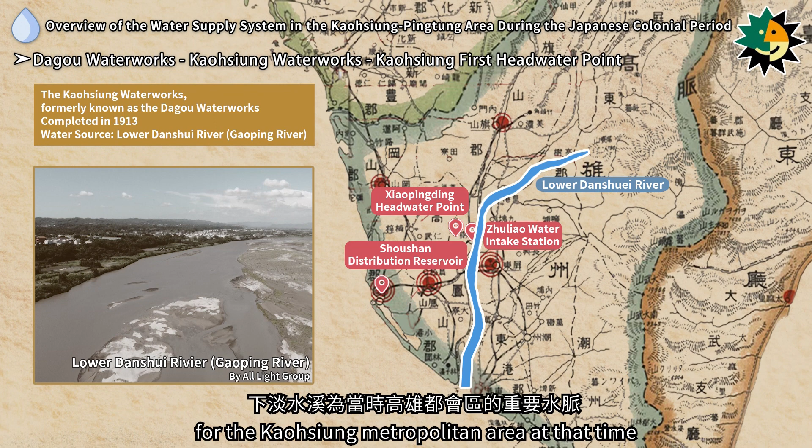The Kaohsiung First Headwater Point consisted of the Zhuliao Water Intake Station, Xiaopingding Headwater Point, and Shoushan Distribution Reservoir. This was Kaohsiung's earliest waterworks, completed in 1913, and the water was drawn from the Lower Damshuei River, which was an essential water source for the Kaohsiung metropolitan area at that time. The Kaohsiung First Headwater Point primarily supplied water to the urban area west of the Love River.

The Kaohsiung Second Headwater Point consisted of the Wongongyuan Water Purification Station and the Cao Tan Distribution Reservoir, completed as an expansion in 1942. It sourced water from the underground flow of the Lower Damshuei River. The Kaohsiung Second Headwater Point mainly supplied water to the urban area east of the Kaohsiung River.

The Qishan Waterworks was completed in 1925. Due to Japan's financial difficulties at the time, it was funded by private organizations. The water source was drawn from the Qishan Canal of the Nanzixian River and channeled into the waterworks through the canal, bringing a continuous supply of water to Qishan Township.

The Gangshan Waterworks was completed in 1925, sourcing its water from the Baijia Canal of the Agongdian River. In 1937, an elevated water tower was added, which became a landmark in Taiwan's architectural history.

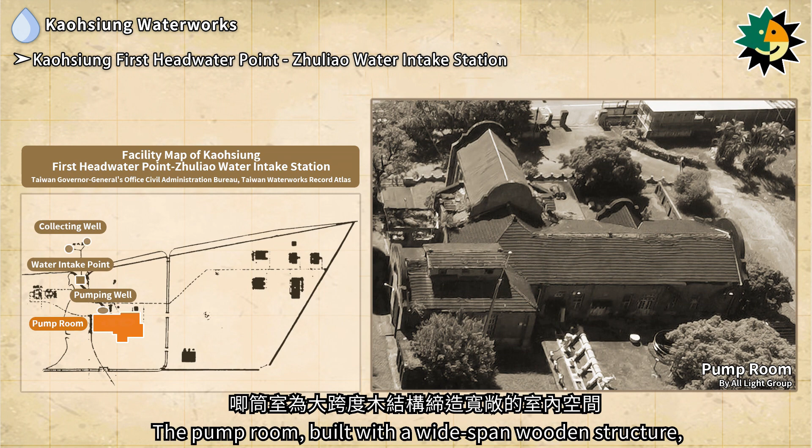The Zhuliao Water Intake Station, originally named the Dagou Waterworks Pump Room, was completed in 1913. The station included a collecting well, water intake point, pumping well, and pump room. The pump room, built with a wide-span wooden structure, provided a spacious interior equipped with modern power-driven pumps.

In 1998, it was designated as a Grade 3 historical site by the Ministry of the Interior, and it is now a municipal monument in Kaohsiung City.

The Xiaopingding Headwater Point, located in Xiaopingding, Dashu Village, was completed in 1913. The site included facilities such as a distribution well, sedimentation tank, sedimentation well, sand filter, sand filtration well, water conveyance well, and sand washing area.

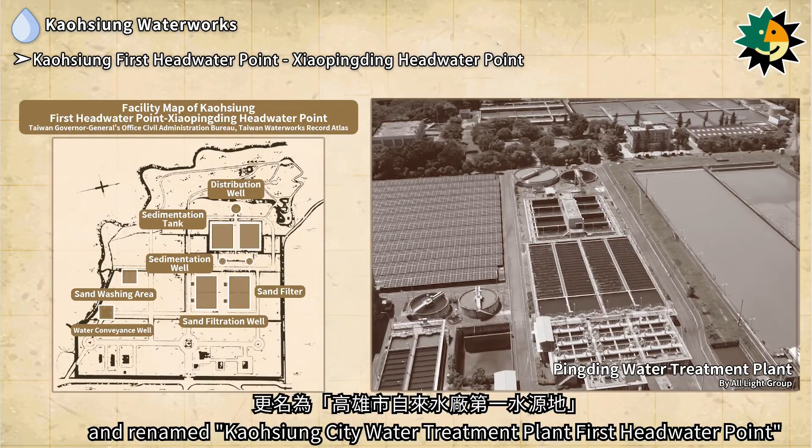After the retrocession of Taiwan, the site was taken over by the Kaohsiung City government and renamed Kaohsiung City Water Treatment Plant First Headwater Point. Covering an area of about 25 hectares, it was renamed the Pingding Water Purification Station in 1974 and integrated into the Taiwan Water Corporation as one of the 6 purification stations serving the greater Kaohsiung area.

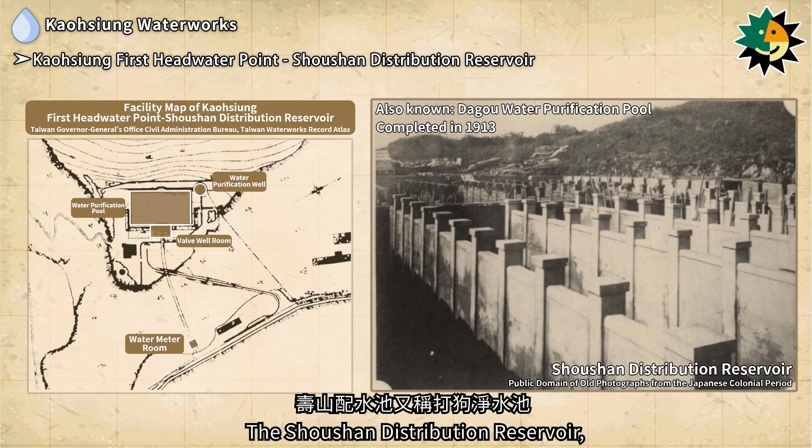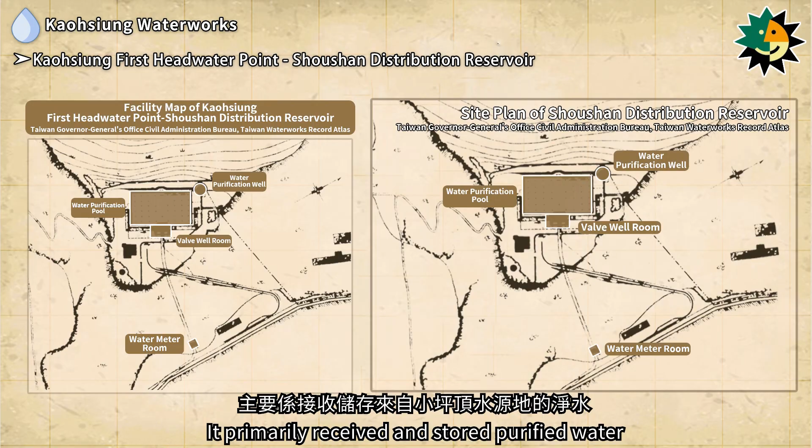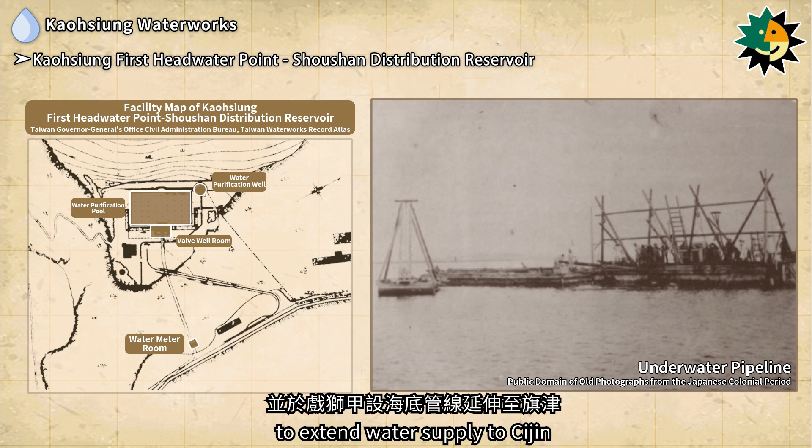The Shoushan Distribution Reservoir, also known as the Dagou Water Purification Pool, was completed in 1913. The reservoir housed facilities such as a water purification well, water purification pool, valve well room, and water meter room. It primarily received and stored purified water from the Xiaopingding headwater point, which flowed through the valve well room to the water meter room at the foot of the mountain and distributed water to the urban area. Additionally, an underwater pipeline was laid at Xishijia to extend water supply to Cijin and provide water to the urban area of Qihou.

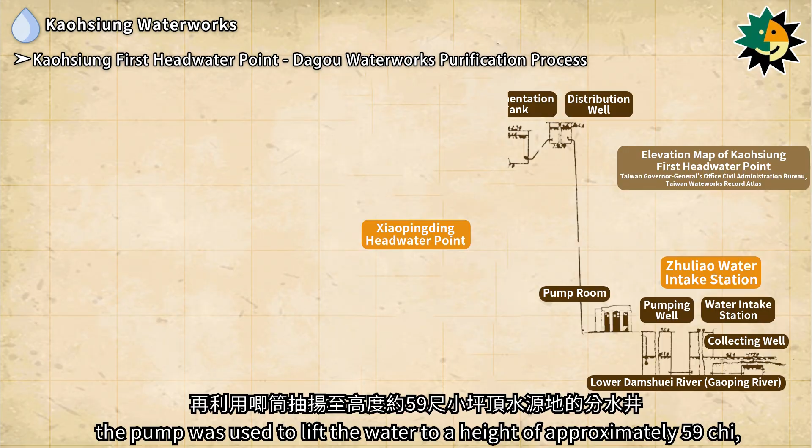The purification process at the Kaohsiung first headwater point began by collecting raw water from the Lower Damshuei River into a collecting well at the water intake station. After water was drawn through the water intake point and into the pumping well, the pump was used to lift the water to a height of approximately 59 chi, where it reached the distribution well at the Xiaopingding headwater point. After undergoing sedimentation, filtration, and disinfection, the clean water was first collected in the conveyance well.

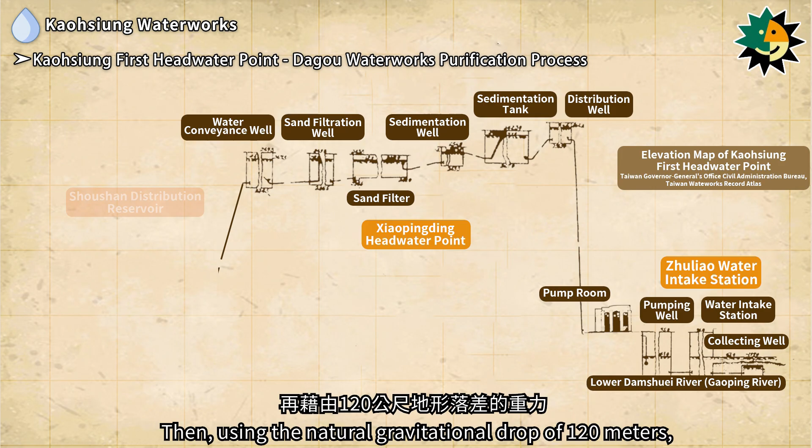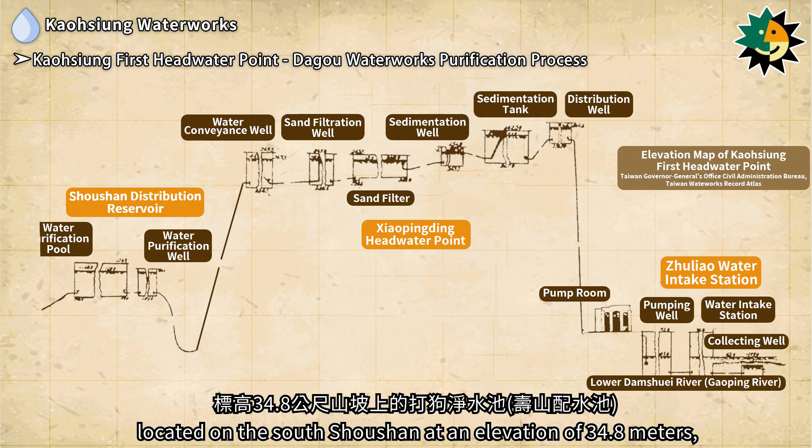Using the natural gravitational drop of 120 meters, the purified water was transported to the Dagou Water Purification Pool located on the South Shoushan at an elevation of 34.8 meters, supplying water to Dagou Port and the urban area.

As factories and heavy industries rapidly developed in the Kaohsiung area, the demand for water significantly increased. In 1942, the second headwater point was established in Wengongyuan, Daliao village, to collect groundwater using collecting wells. Additional facilities such as aeration basins and sand filters were installed, and a distribution reservoir was built on the hills of Kaohsiung and Daliao to supply water primarily to the areas east of the Kaohsiung River.

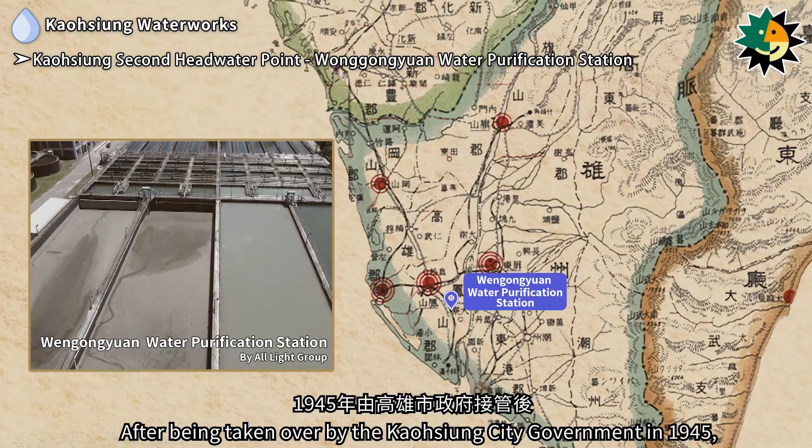The Wengongyuan water purification station, located in Daliao village, was completed in 1942, with a designed output of 8,350 cubic meters per day, capable of serving 50,000 people. After being taken over by the Kaohsiung city government in 1945, the plant underwent continuous improvements and expansions, and it now has a designed output of 36,000 cubic meters per day.

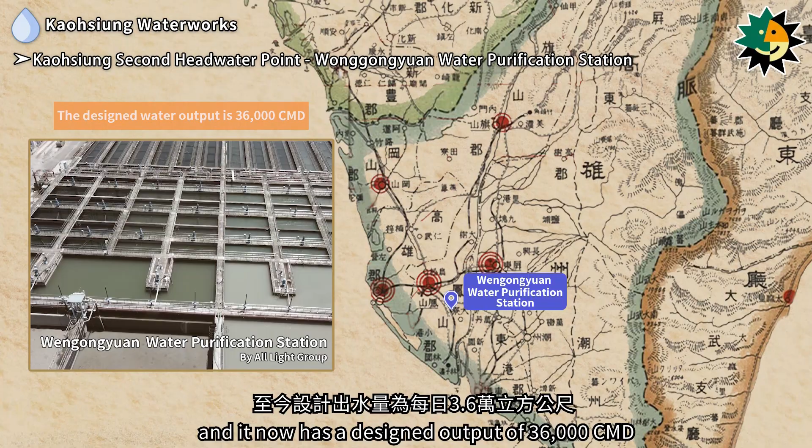The Kaohsiung Distribution Reservoir, located on the hills of Kaohsiung and Daliao, was completed in 1942. It primarily distributed purified water from the Wengongyuan water purification station to the Kaohsiung area. After the completion of the Kaohsiung water treatment plant in 1972, the distribution reservoir was decommissioned and no longer used.

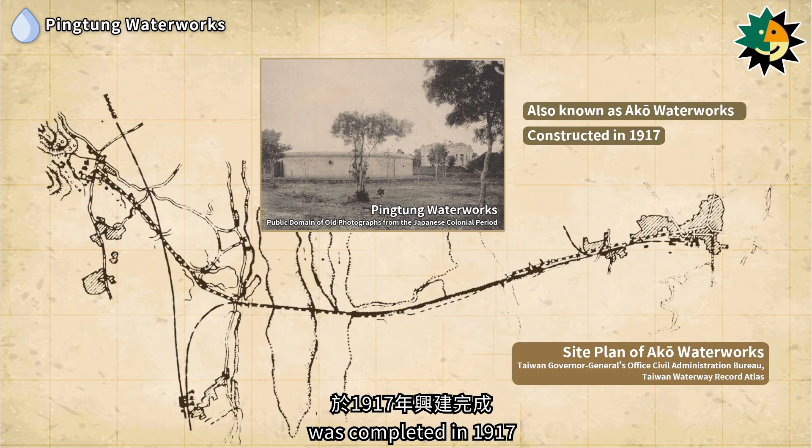The Pingtung Waterworks, also known as the Akō Waterworks, was completed in 1917. Its purpose was to meet the local residents' water needs and improve environmental sanitation.

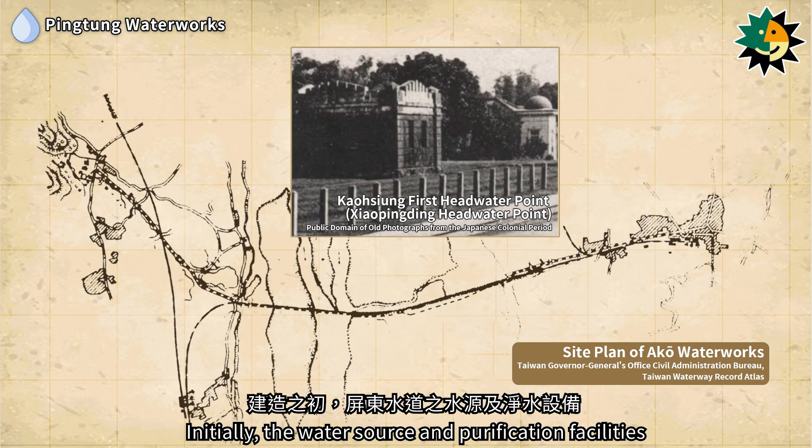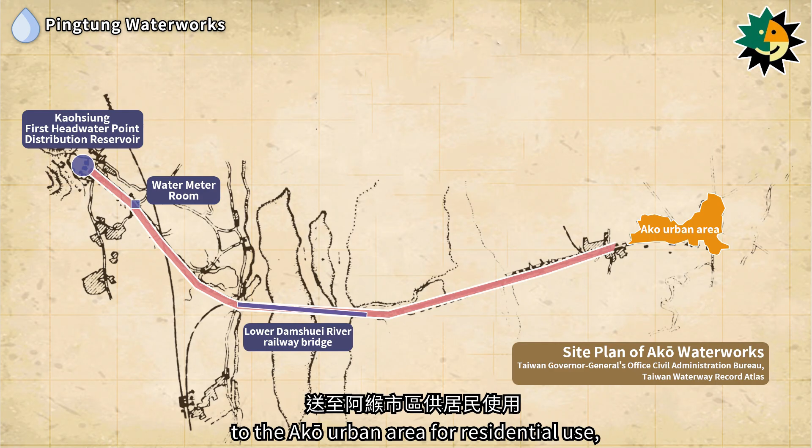Initially, the water source and purification facilities of the Pingtung Waterworks were shared with the Kaohsiung first headwater point. After the water was filtered at the Xiaopingding headwater point, it was transported via the Akō Waterworks water meter room and the Lower Damshuei River railway bridge to the Akō urban area for residential use, with a planned supply for 15,000 people. As Pingtung's population grew and the water supply from the Kaohsiung first headwater point became insufficient, a new headwater point was sought for the Pingtung Waterworks in 1934.

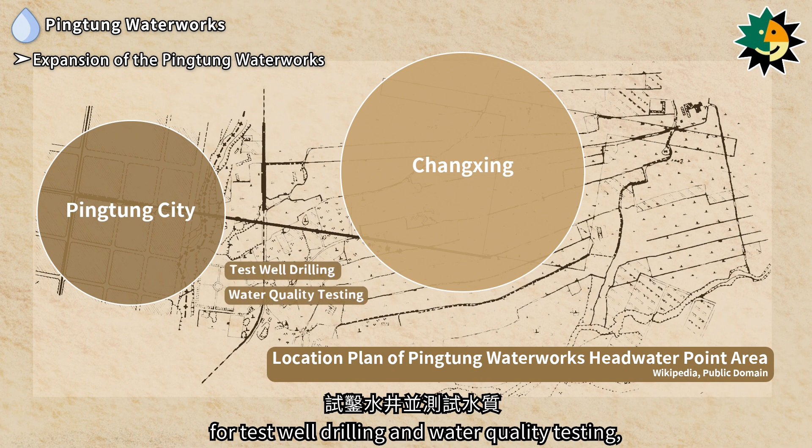The eastern side of Pingtung City, in the Changxing area, was selected for test well drilling and water quality testing, which revealed that the groundwater was both high quality and abundant. Thus, in 1936, Changxing was established as the new headwater point, and the expansion of the Pingtung Waterworks was completed in 1938, allowing the Pingtung Waterworks to operate independently from the Kaohsiung first headwater point.

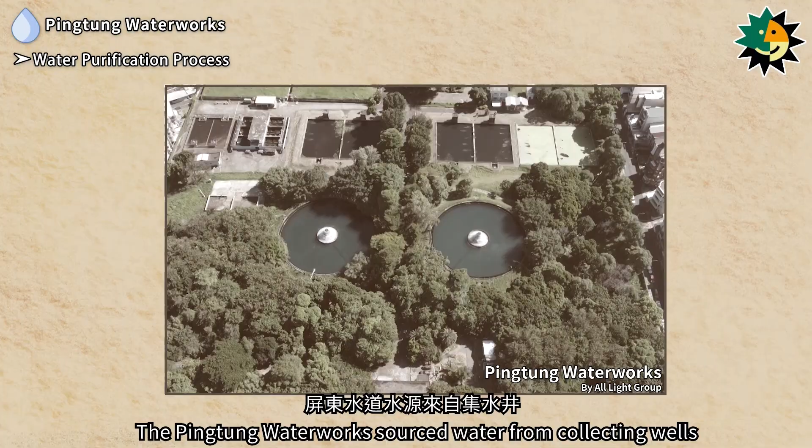The Pingtung Waterworks sourced water from collecting wells. The raw water passed through aeration basins and flowed into sand filters for purification. After filtration, the water was pumped from the pumping well to a distribution tower 30 meters high. The purified water then naturally flowed downward by gravity to supply 45,000 residents in the Pingtung urban area.

The Cishan Waterworks was built in 1925. Due to financial difficulties following the 1923 Great Kanto earthquake, the Cishan Waterworks was initially funded by private investment.

The Cishan Credit Union signed a water supply agreement with the Irrigation Association, where the credit union was responsible for constructing the waterworks facilities and the irrigation association provided the water from the Qishan Canal of the Nanzixian River. Once the waterworks were completed, ownership of the facilities was transferred to the irrigation association, which paid a usage fee to the credit union. The Cishan Waterworks was the earliest modern water supply system built in Kaohsiung County at that time.

In 1929, due to the irrigation association's unstable water supply and the credit union's insufficient financial resources, the local government purchased the Cishan Waterworks system and made improvements using public funds. A water purification pool was added in 1930.

After 1945, as the population of Cishan increased and the Cishan Canal began to experience reduced water flow due to poor maintenance, the facilities gradually became insufficient to meet demand. In 1954, a new water intake point was established at the Cishan embankment, and an 850 cubic meter water reservoir was added at the foothills of Zhongshan Park.

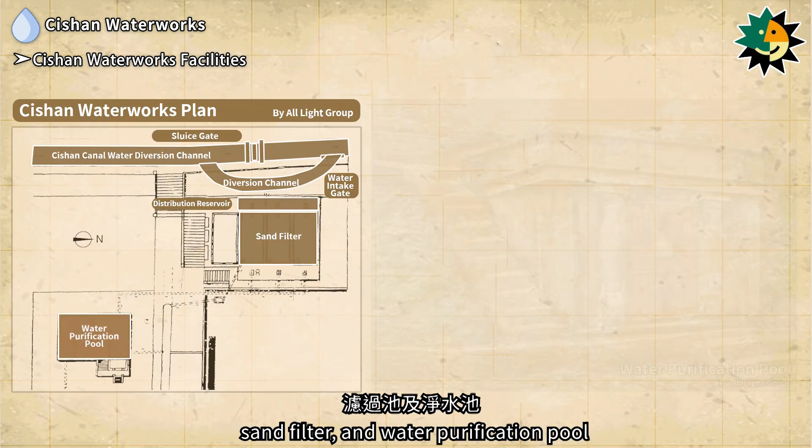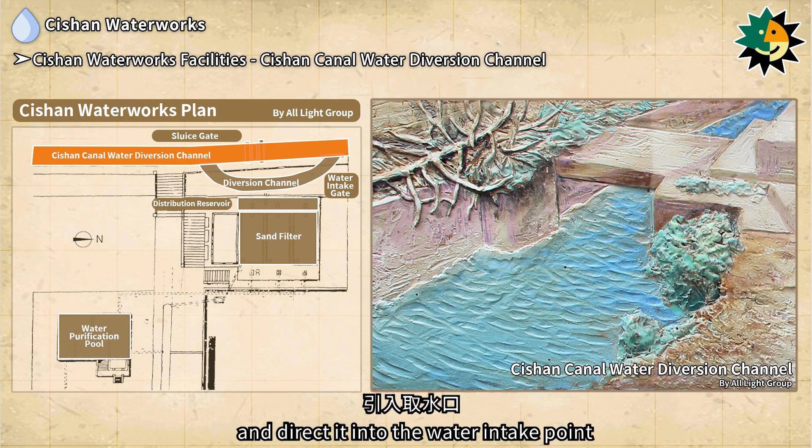The Cishan Waterworks facilities included the Cishan Canal water diversion channel, sand filter, and water purification pool. The Cishan Canal was the source of water for the Cishan Waterworks. The water diversion channel was inverted trapezoidal, with a sluice gate installed at the top to block the water and direct it into the water intake point.

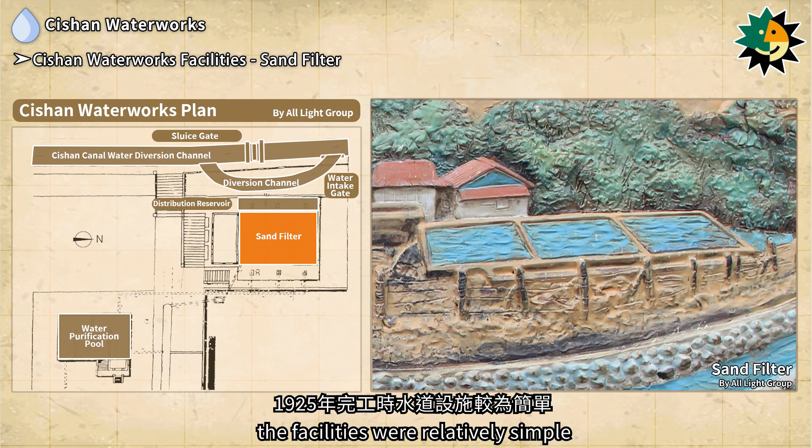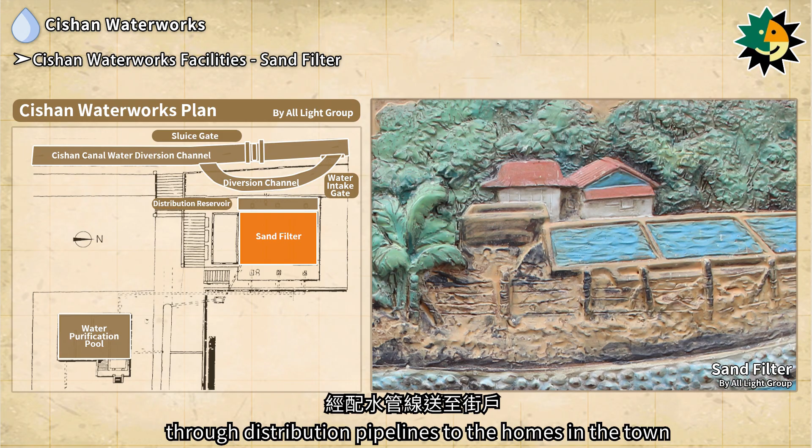The sand filter was made of reinforced concrete. When the waterworks were completed in 1925, the facilities were relatively simple. Water from the canal was filtered, and the natural water level difference was used to send water through distribution pipelines to the homes in the town. Initially, the Cishan Waterworks did not include a water purification pool.

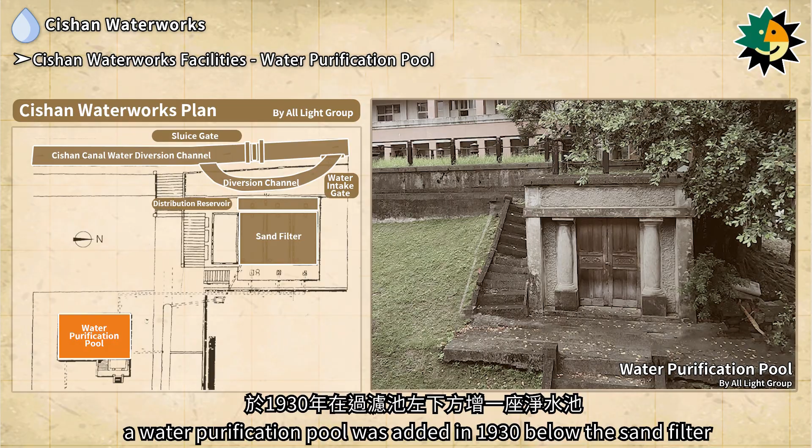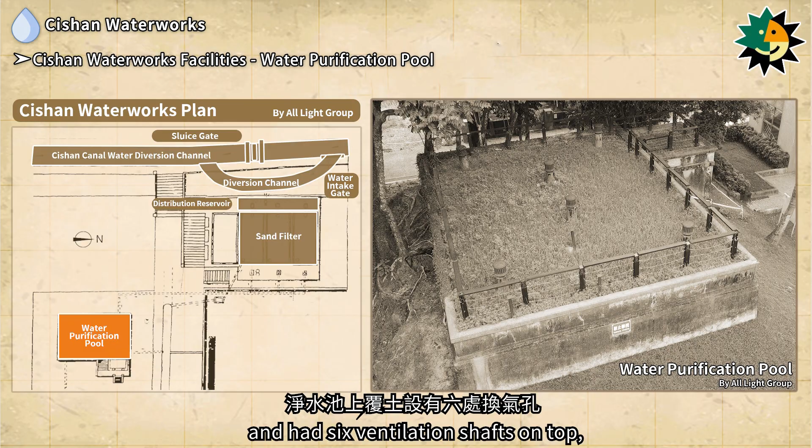After the government acquired and upgraded the waterworks in 1929, a water purification pool was added in 1930 below the sand filter to improve water quality. The water purification pool was covered with soil and had 6 ventilation shafts on top, along with a front chamber at the entrance.

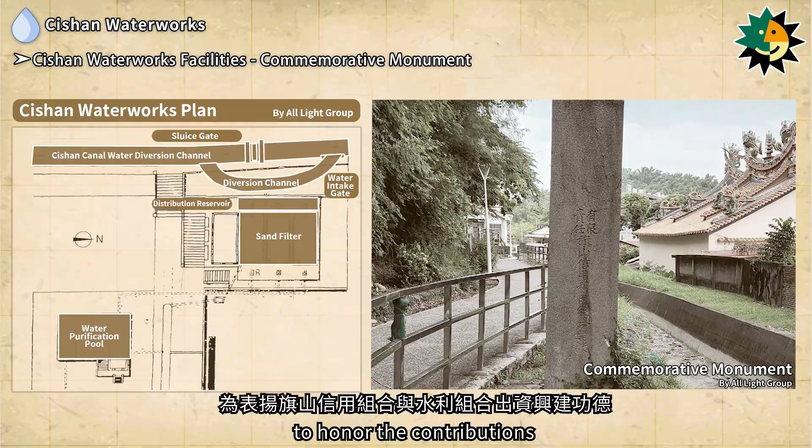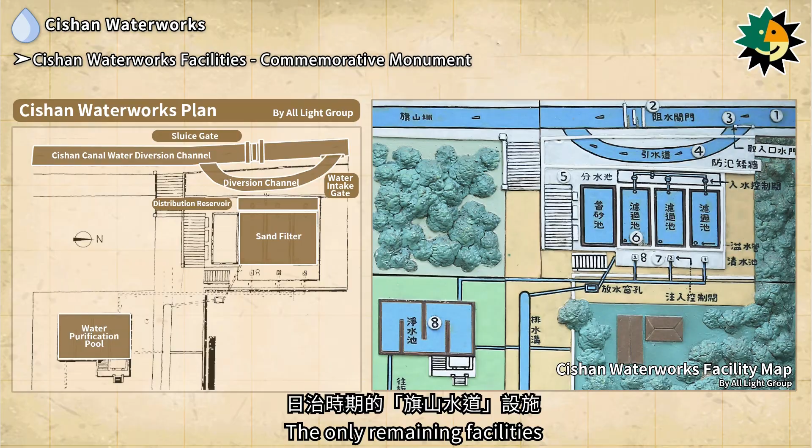The commemorative monument was erected in 1925 after the completion of the Cishan Waterworks to honor the contributions of the Cishan Credit Union and Irrigation Associations, whose investments made a lasting impact on the economic development of Cishan. The only remaining facilities from the Japanese colonial period Cishan Waterworks are the Cishan Canal Sluice Gate, the water diversion channel, the water purification pool, and the commemorative monument.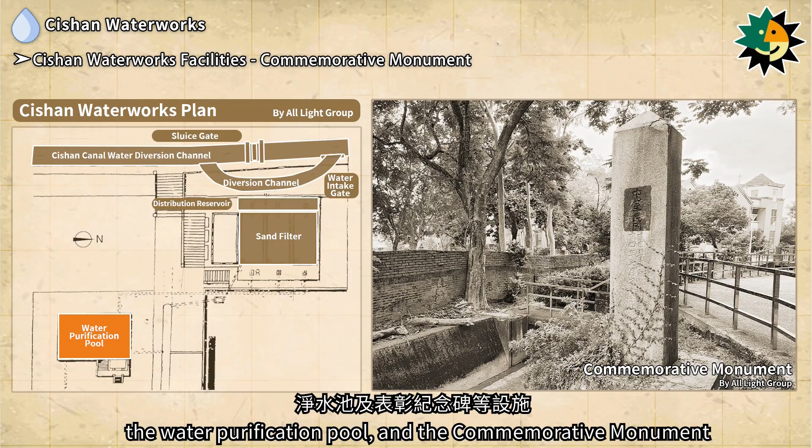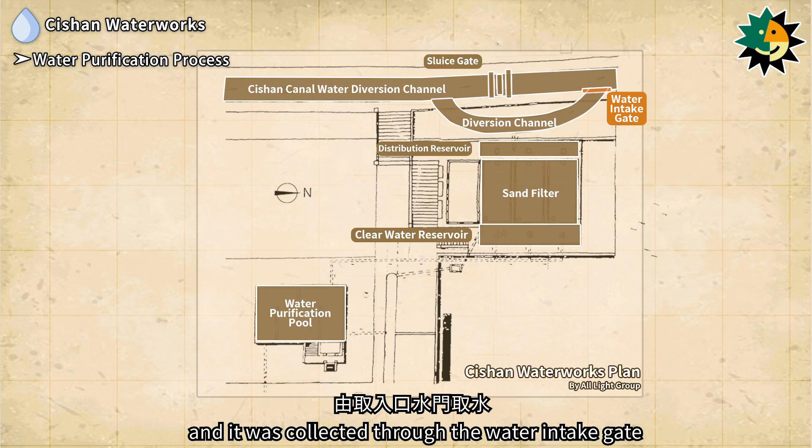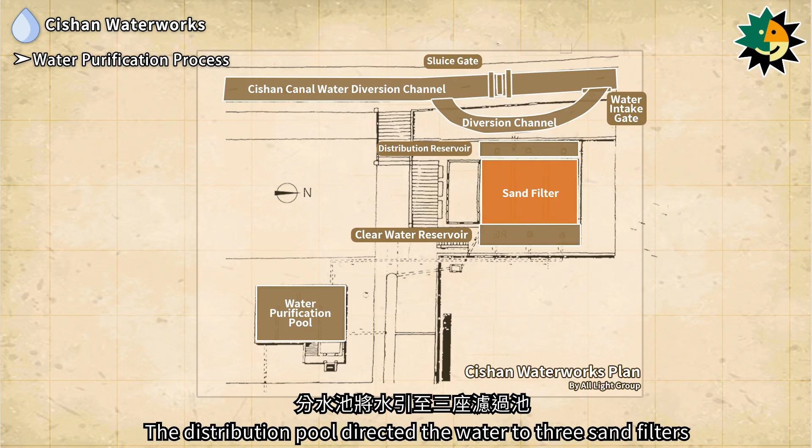The water purification process of the Cishan Waterworks began by diverting water from the Cishan Canal. The sluice gate blocked the water, and it was collected through the water intake gate. The water was then channeled through the diversion channel into the distribution reservoir, where sand could be washed if necessary. The distribution pool directed the water to 3 sand filters.

After filtration, the water was sent to the clear water reservoir, which then transported the water to the purification pool for storage. From there, the purified water was distributed through pipelines to the urban area for residential use.

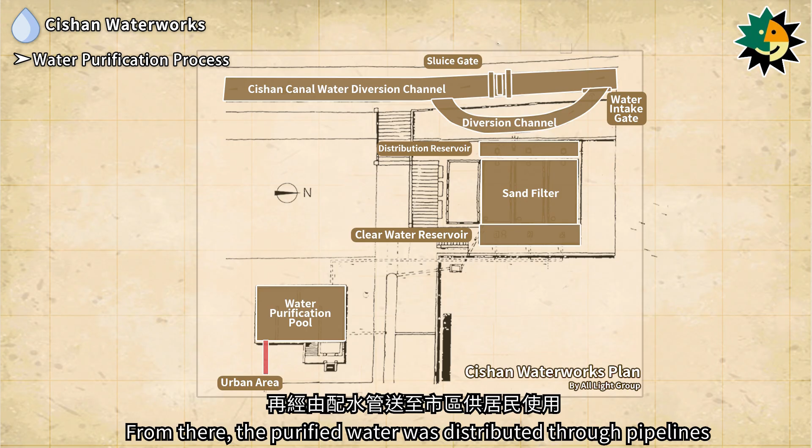The Gangshan Waterworks was built in 1925, with its water source drawn from the Baijia Canal of the Agongdian River. Initially, it was a simple waterworks system, but as the population in Gangshan Street grew, an expansion project took place between 1937 and 1938. An elevated water tower was constructed to provide pressurized water distribution, supplying municipal water for 7,000 people in the Gangshan area.

Subsequent expansion projects for the Gangshan Water Purification Station were carried out in 1957 and 1962. During these phases, the slow sand filter was replaced with a rapid sand filter, and a pump room was built to replace the function of the water tower for pressurization. The Gangshan Water Tower was converted into a high-pressure backwash system for the rapid sand filter.

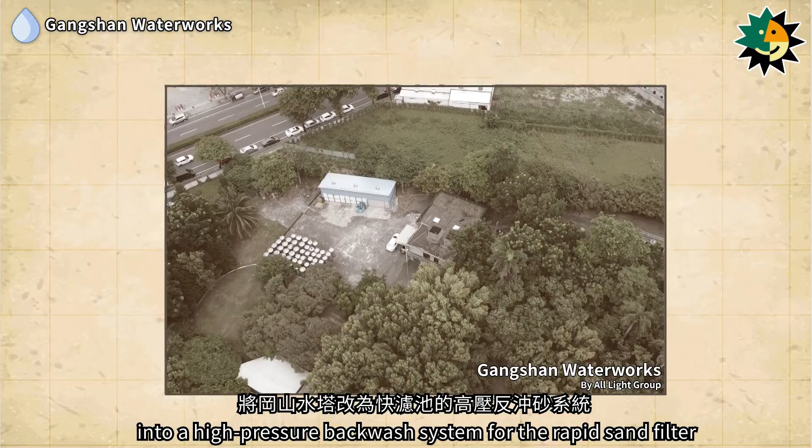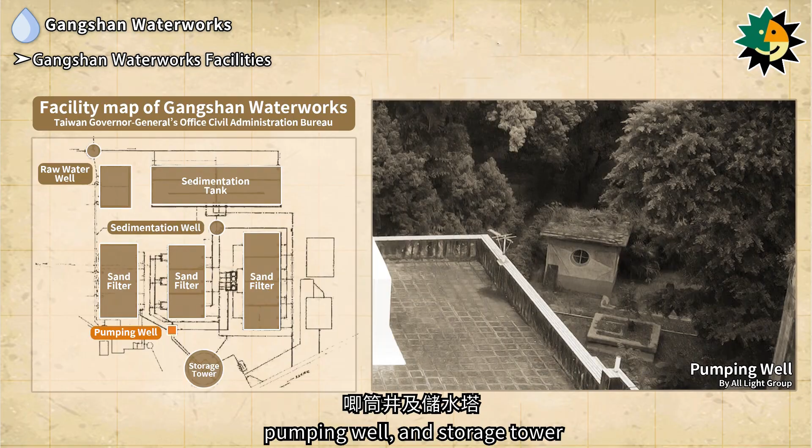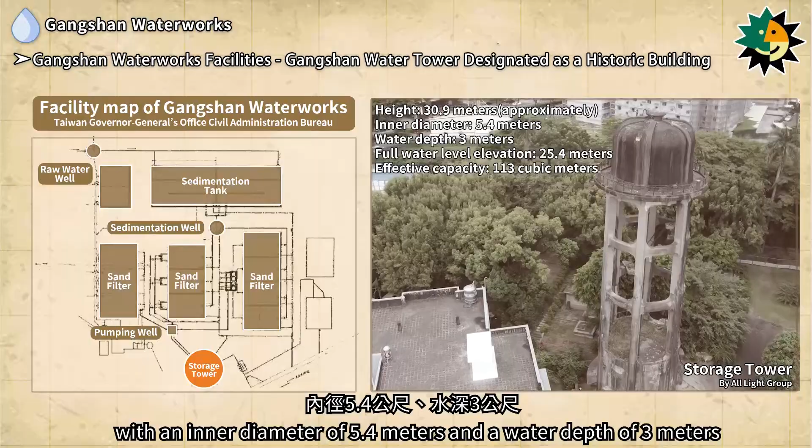The Gangshan Waterworks facilities included a raw water well, sedimentation tank, sedimentation well, sand filter, pumping well, and storage tower. The Gangshan Water Tower is a reinforced concrete structure, approximately 30.9 meters high with an inner diameter of 5.4 meters and a water depth of 3 meters.

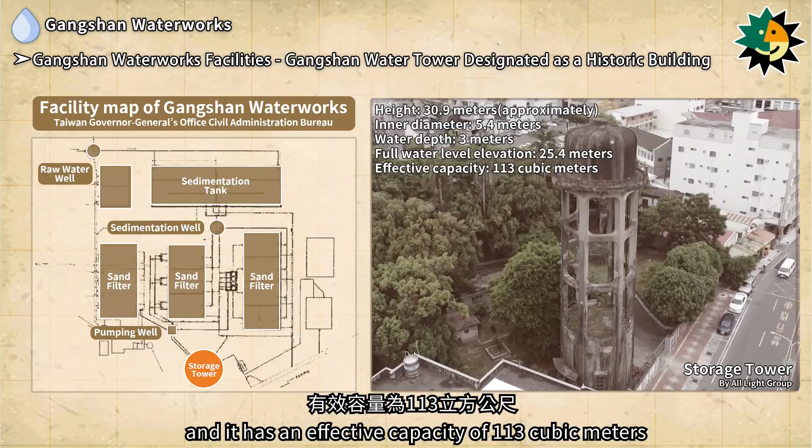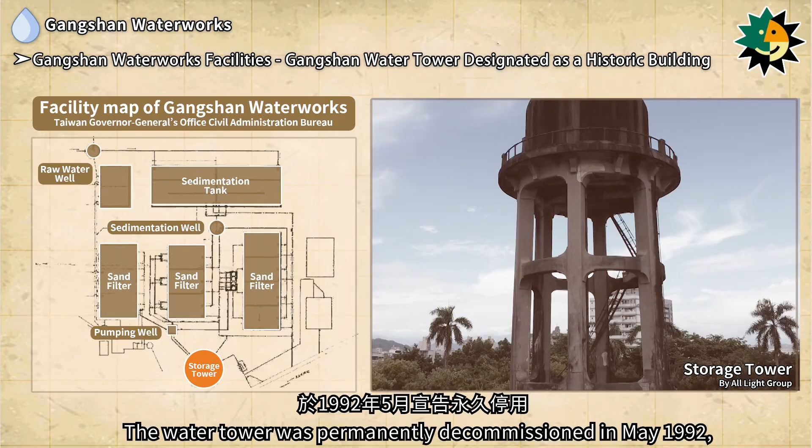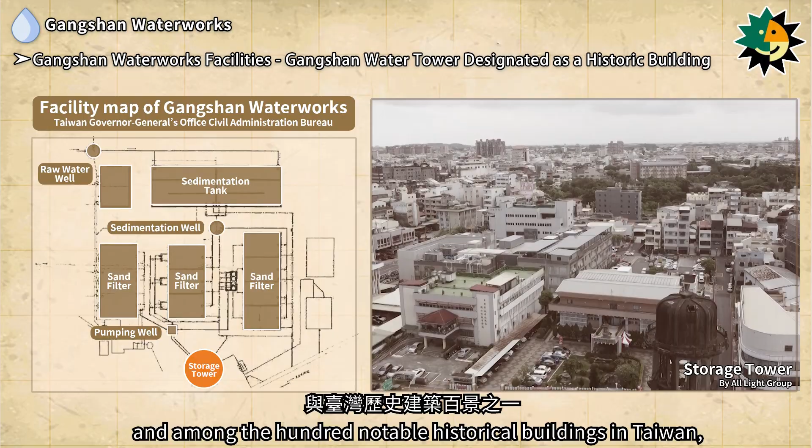Its full water level reaches an elevation of 25.4 meters, and it has an effective capacity of 113 cubic meters. The tower contains a water level gauge, and the main structure remains intact. The water tower was permanently decommissioned in May 1992, and in 2004, it was declared a historic building. It is one of the top 10 historical buildings in Kaohsiung County and among the 100 notable historical buildings in Taiwan, serving as an important landmark in the Gangshan area.

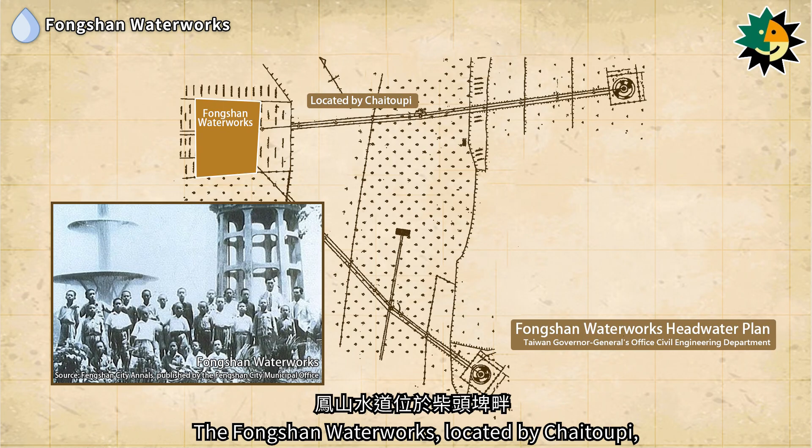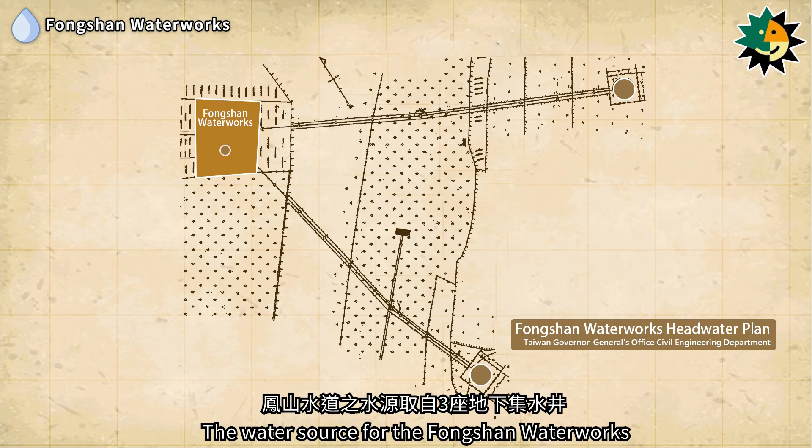The Fongshan Waterworks, located by Chaitoupi, began construction in December 1933 and was completed in October 1934, taking only 11 months. The water source for the Fongshan Waterworks came from 3 underground collecting wells, 1 at the headwater point and 2 at Chaitoupi. The maximum daily output was 2,400 cubic meters.

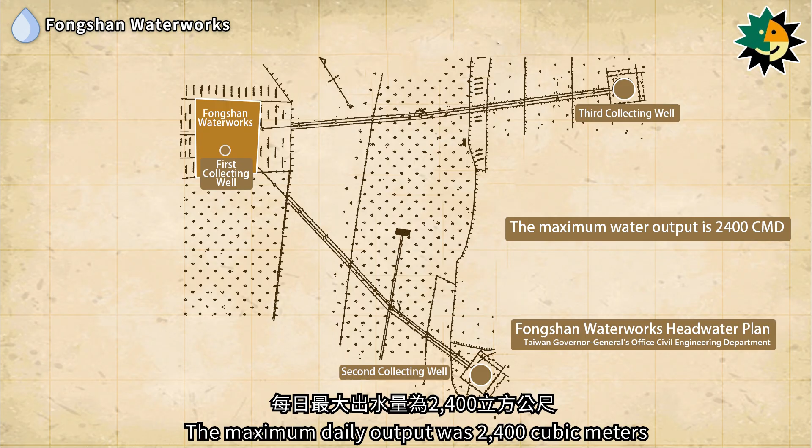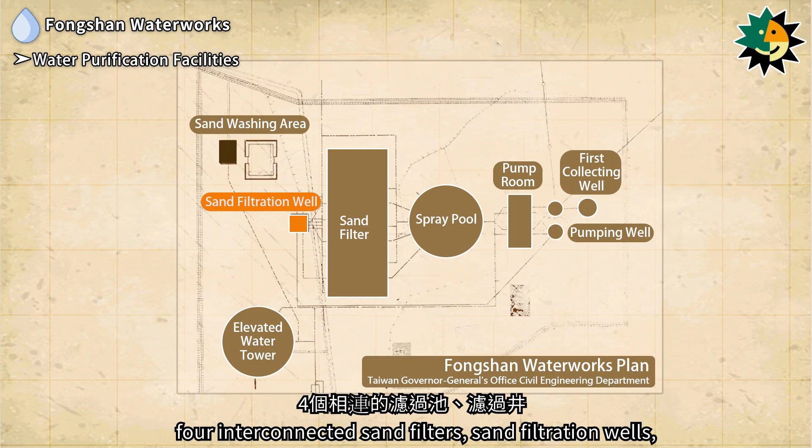The Fongshan Waterworks facilities included collecting wells, a pumping well, a pump room, a spray pool, four interconnected sand filters, sand filtration wells, a sand washing area, and an elevated water tower. The Fongshan Waterworks originally functioned as an independent system using water from the underground collecting wells at Chaitoupi.

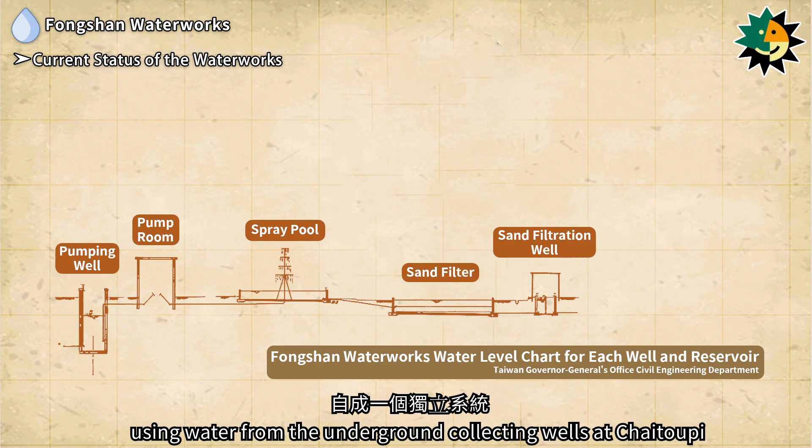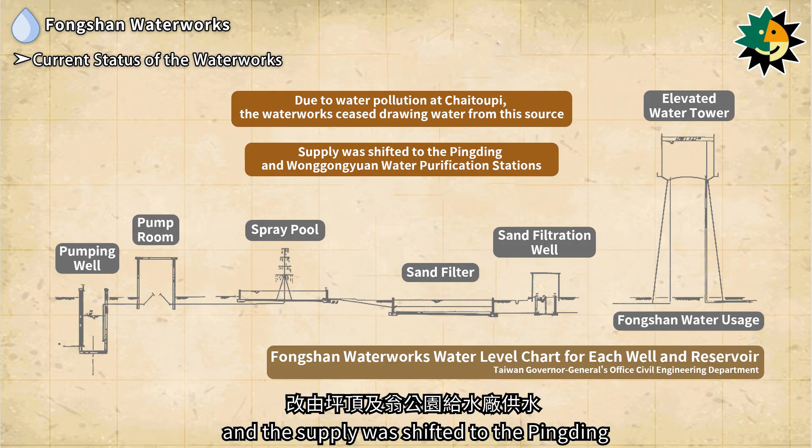In 1972, due to water pollution at Chaitoupi, the waterworks ceased drawing water from this source, and the supply was shifted to the Pingding and Wonggongyuan water purification stations. The aeration tower was dismantled in 1984.

The land containing the Chaitoupi headwater point, sedimentation tank, aeration tower, sand filters, and collecting wells was returned to the Fongshan City Office in 1973. The reclaimed land has since been redeveloped into congregate housing. Currently, only the office area of the Fongshan Service Center remains, with the site area reduced from 1.2 hectares to 0.19 hectares.

The elevated water tower of the Fongshan Waterworks was once a landmark of Fongshan and a shared memory of the older generation. However, after being damaged by the 9/21 earthquake in 1999, the tower was dismantled in 2000 for safety reasons and replaced by a parking lot.

The construction of waterworks in the Kaohsiung-Pingtung area during the Japanese colonial period effectively addressed the issues of unclean drinking water and poor sanitary conditions, which had led to epidemics. These waterworks laid a critical foundation for the development of the region.

Starting in 1909, the Taiwan Governor-General's Office successively built the Kaohsiung Waterworks, Pingtung Waterworks, Qishan Waterworks, Gangshan Waterworks, and Fongshan Waterworks. These structures were grand and meticulously designed, and despite over a century of history, they still retain their original splendor, holding a special place in the memories of local residents.

The construction of waterworks was a revolutionary and universal engineering achievement in the development of modern cities, and the topic of public water supply is one worthy of deep exploration. As we enjoy the benefits of clean water today, we are reminded to honor the efforts and contributions of those who came before us, whose work continues to inspire gratitude and admiration.